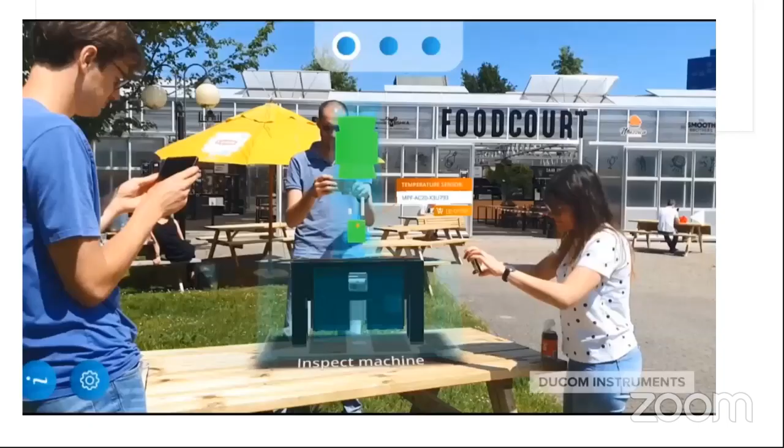A little bit of a quick update on what MOOHA is, because this connects us to the next step, another element that we cover in smart industry. So this is a quick introduction to what MOOHA is. Basically, she brings a virtual tribology lab experience. This is the digital twin of our 4-ball tester, for example.

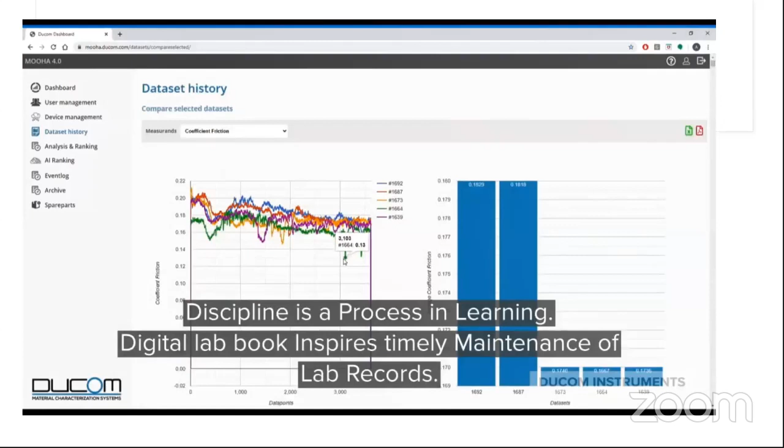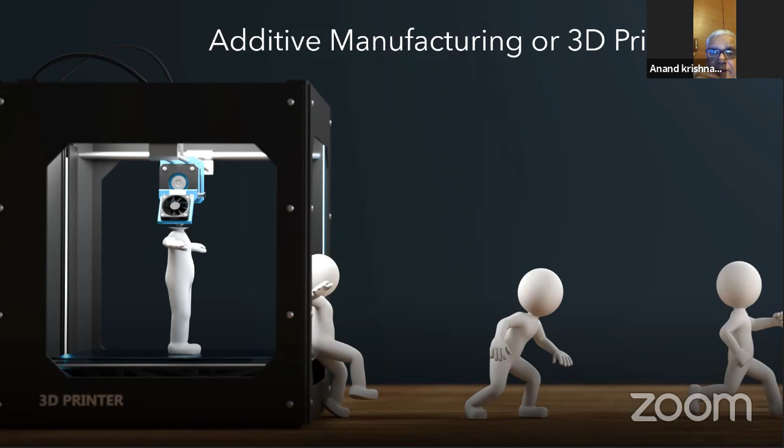Hello. Hello. You just dropped off for a minute. Okay. Can you see the screen now, Anand? Not really, I can only see my screen. I can see only my face, but not the screen that you're sharing.

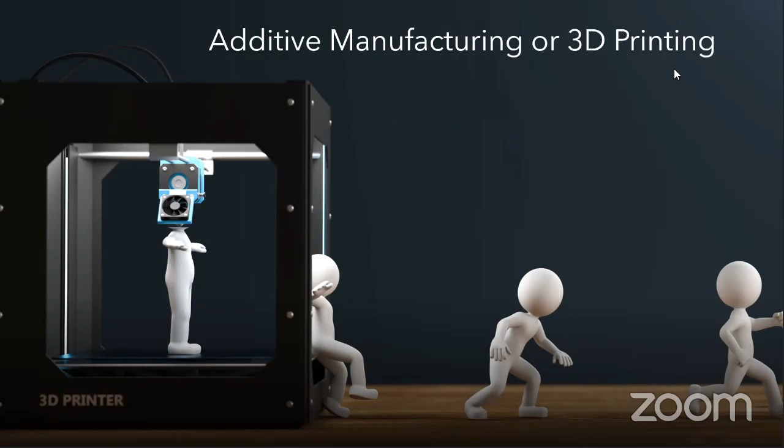All right, so I'll tell you what we'll do. I trust that the audience can see the screen, so I'll just ask you to scroll down the slides, and that should still work out. Excellent, I will do that.

So let me do some introduction to this, Anand. Right, sure. So the video you watch was related to how a combination of Internet of Things and augmented reality is able to create a digital twin of tribometers, and that was delivered as a product by MOOHA.

Moving forward, another important element in smart industry is additive manufacturing. What is additive manufacturing? It's a process of implementing manufacturing technology layer by layer. The benefits are that it helps reduce the cost of manufacturing, so the value to the customer is a high value at a low price. And the most important element for industry adopting additive manufacturing is that they are able to be competitive to any changes in market trends.

So that's the power — it creates mass customization, mass modularization, mass variety. As a result, you see the benefits here. 3D printing, additive manufacturing, which used to be largely limited to a prototyping tool, is moving towards the mainstream as a manufacturing tool. It has changed how we design, how we manufacture, and how we sell products.

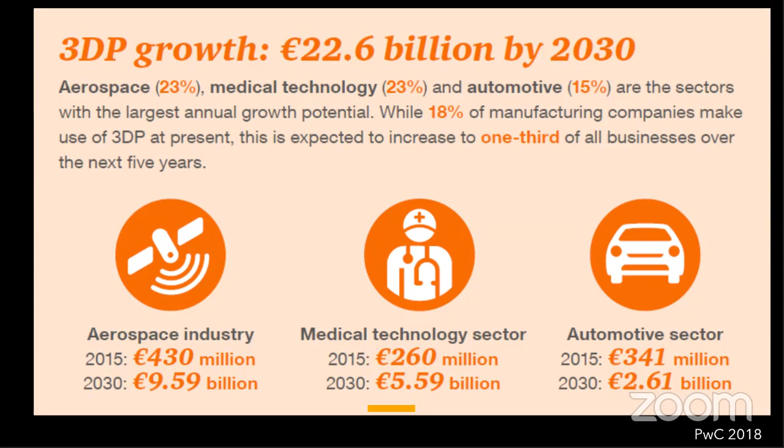To discuss in depth how additive manufacturing would be playing a very important role in various sectors, and how tribology would be creating more value here, and the concepts one has to be aware of before jumping into additive manufacturing...

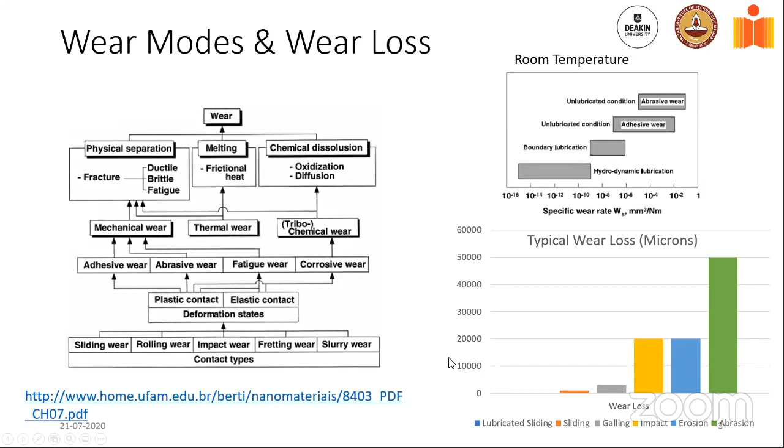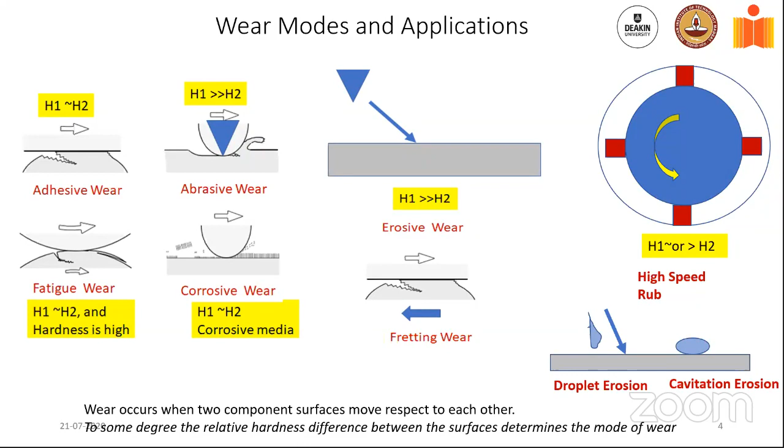Create better surfaces - that's really what I've done for a living over the last 30 years. Create component surfaces with better and better materials that actually have better resistance to wear. The question I'm posing now, and towards the end as well, is how do you essentially combine additive manufacturing with better wear resistance?

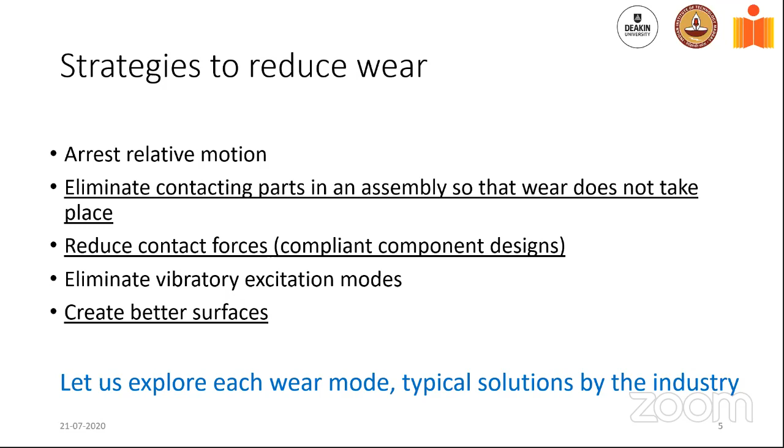Now I'm going to jump gears a little bit and show some cartoons of turbo machinery. This goes back to the ASM Handbook in 1992 by J.D. Schell, Aircraft Engines. He was my mentor, and I want to say he passed away many years ago, but he was essentially a master in this field, and he knew everything about wear in turbo machinery.

This is a very busy slide, but what I really want to say is that all these black dots represent what is called sliding and fretting wear. These open circles represent high-speed rubbing, which takes place at Mach 1 velocity. Then you have these bearings, which are high-speed, highly loaded bearings - sorry about the small font. And then you have fasteners, which can undergo fretting. In a very simple snapshot, this covers the entire spectrum of the kind of wear that would take place.

What you would also see is that the engine is rotating, it's on the wing, it's taking off from the runway. You can have sand and snow and salt during winter, and it could pick up all the sand into the engine, which would cause erosion. You could have flights going back and forth between Bombay and the Middle East, for example - Bombay is dry and dusty for 8 months a year, very wet for 4 months, but flying into the Middle East it picks up sand again, and you have solid particle erosion taking place, which is very severe.

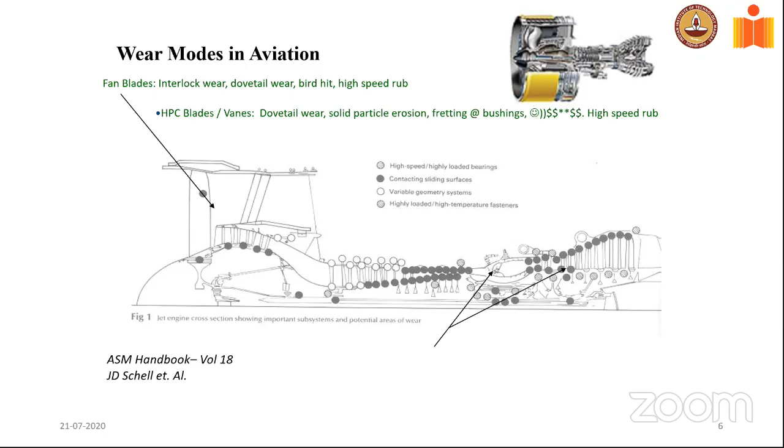So why does it matter? I'll ignore the line on pitting corrosion, that's a different mechanism. But when I look at fretting and impact, we can see a 3 to 5x reduction in life. Looking at solid particle erosion, there can be a 3x reduction in life, with a 1 to 2% drop in efficiency. Look at high-speed rub - you have a 1 to 2% drop in efficiency. And then you have high temperature thermal barrier, which I would leave for now.

What happens is that you have a wide range of operating conditions, as the table shows, all the way from 10 MPa stress to 1000 MPa stress, room temperature to 1000 degrees Celsius for fretting and impact.

What would be the solution for fretting and impact? We have a complete suite of coatings, and I would really recommend you look at ASM Handbook Volume 18, 1992, and also ASM Handbook Volume 18, 2017. I was asked to write a review article for wear and erosion issues on gas and steam turbines, so between aviation and gas and steam turbines, the entire aspect of tribology essentially gets discussed in these chapters.

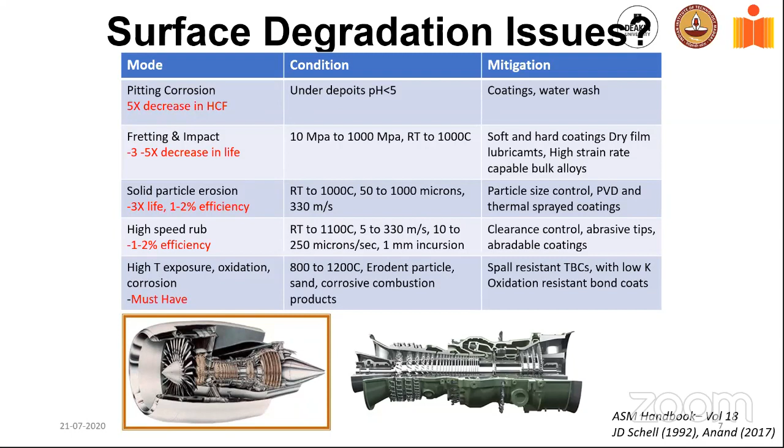For solid particle erosion, we use PVD coatings and thermal sprayed carbide coatings. For clearance control, we have soft abradable coatings. And as far as high temperature is concerned, we use thermal barrier coatings.

Now, not all of you will be working in the turbo machinery area. So if I start taking a look at dry sliding wear, lubricated wear, abrasive wear, solid particle erosion, and cavitation in all the other industries, it's extensive. I don't know how many of you remember the days of the 1980s in the US, or the 1970s and 80s in India - the cars we had essentially had very thick paint, and the exterior was not glossy, it had a very dull matte finish.

The reason why it had a matte finish is because when you cold roll the steel, the wear on the rolls essentially marks the steel, and you get the steel coming out of the cold rolling mill with a matte finish because of wear. It would have scratches, a matte finish, and so on.

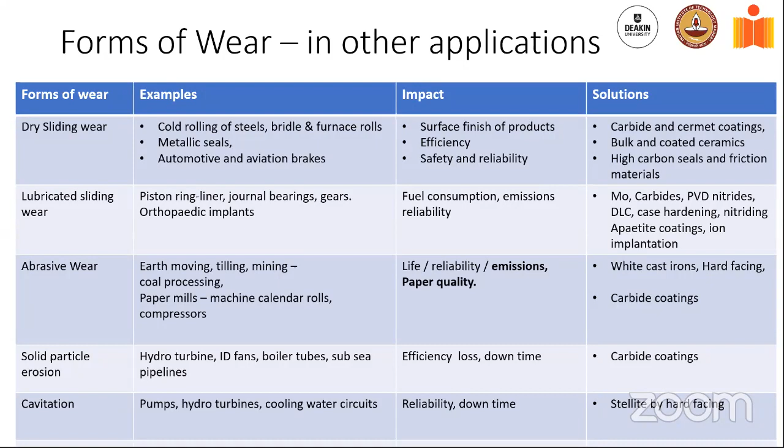So the question then is, how do you go the additive manufacturing route and still come up with a solution? That's what I'll come to in the subsequent slides.

One more example of wear, but a good example of wear. Without wear, you cannot have machine surfaces. All the machine shops would go dead if you didn't have wear taking place. It's a very complicated phenomenon. You have a cutting tool that gets in contact with the workpiece. It digs into the workpiece, causes intense plastic deformation and shear. As the intense plastic deformation takes place in a very localized region, the heat builds up and the surfaces oxidize and slide against the cutting tool, leading to what we call crater wear.

Underneath the cutting tool, in the wake, you have tensile stresses. You can have abrasion taking place. You can have chipping taking place. If you see this graph, you can actually see 3 different wear mechanisms taking place on the cutting tool when you do the machining.

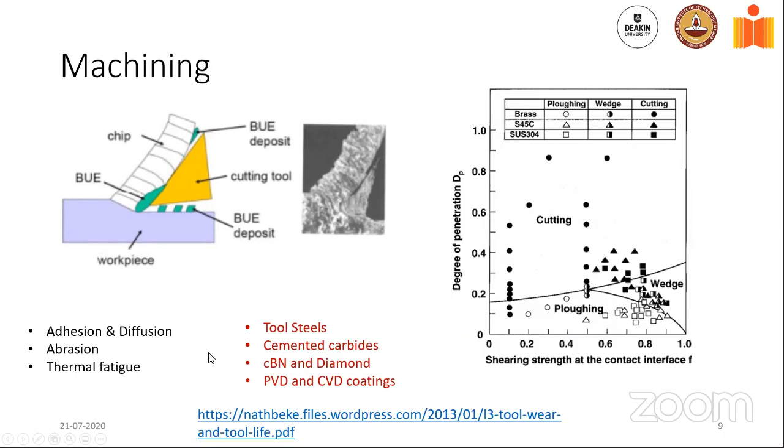So again, what you want to say is that wear is a surface phenomenon, and the bulk materials essentially perform the function of providing strength, durability, reliability, and so on. And when the surface and the bulk are actually married together to have a durable component, you do that through surface engineering. And that's really what I want to talk to you about.

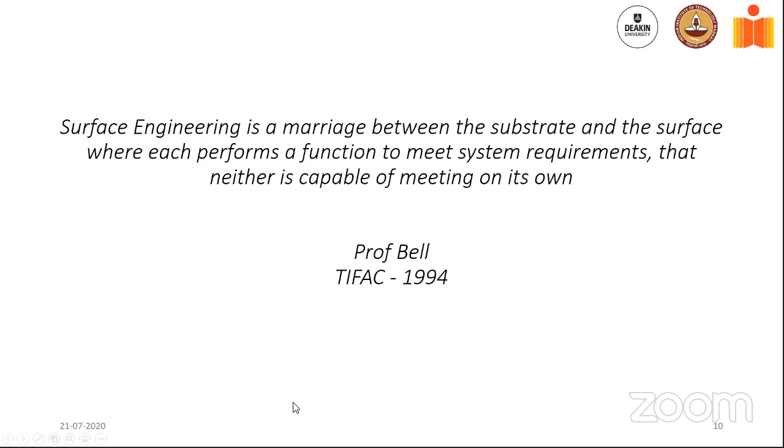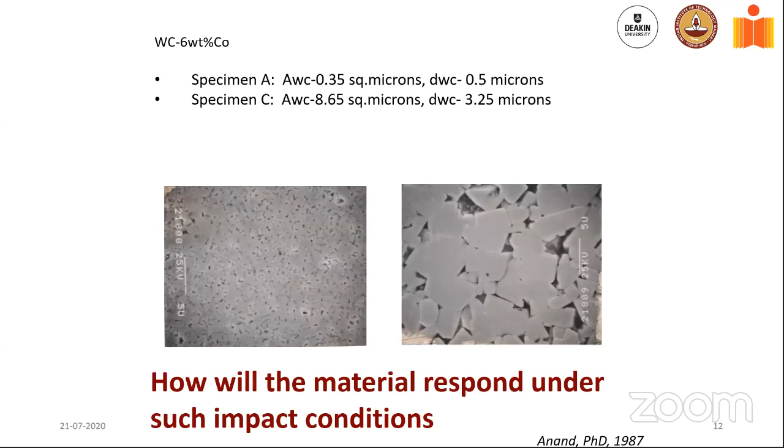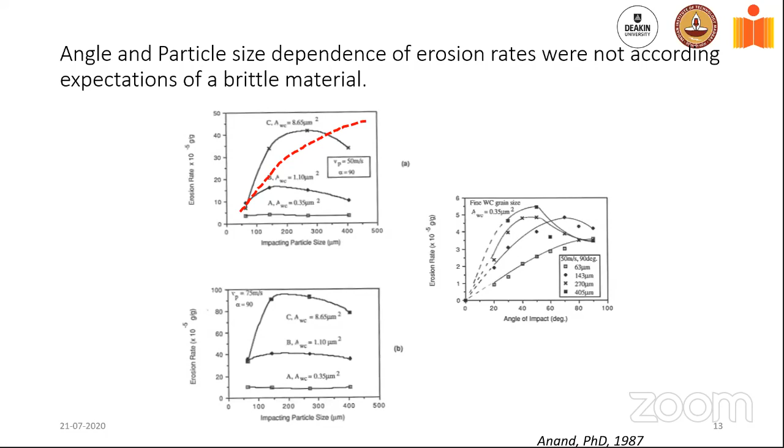Some of the best materials that you have today to resist wear, even now after 30 years, is tungsten carbide cobalt. We use it for cutting tools. It's used in mining industry. It's used in aviation parts to protect components from wear. It gets used in pumps. It gets used in compressors. It's really extensive to see where it gets used.

But the trick is two things. One is that I want to have a coating which is dense. So I don't want a porous coating which has got poor integrity, because the pores essentially are crack formers. The pores would then come together and they would form a crack, and the crack would propagate. Irrespective of how good your material was, because it is deposited in a manner of poor integrity, the whole thing would come apart.

So what you do essentially is coat these materials. You start off with powders which are around 10 to 35 microns, and you put them through a thermal spray gun. You've got plasma, which is a high temperature process with moderate velocity, 200 meters per second. And then I have high velocity oxyfuel, which is lower in temperature but higher in velocity.

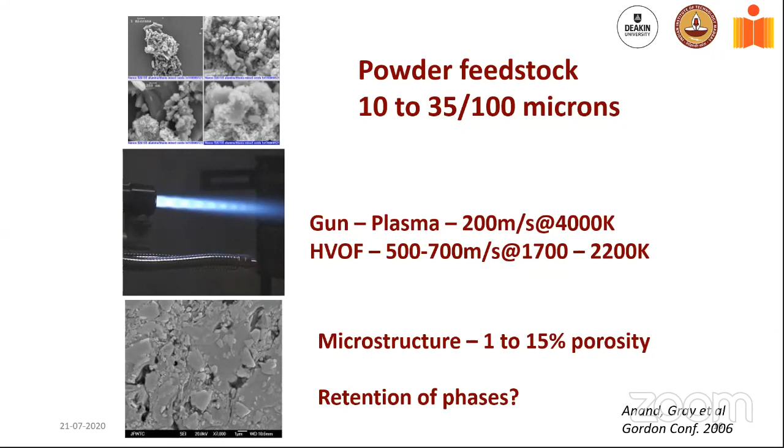So that's what you're going to see in the next slide, which is engineering tungsten carbide-based thermal spray coatings for fretting resistance. Fretting resistance, among other things, is a function of fracture toughness. I can't show you all the data I have on fretting wear properties - that gets into stuff which is proprietary. But what you can see is that for the same composition, by adjusting the process parameters and the equipment used, I can essentially have a fracture toughness change by an factor of 3. So I can go from a fracture toughness of around 2.5 MPa square root meter to around 8 MPa square root meter. That's really because of the kind of microstructures that these coating processes have produced.

The reason why I wanted to cover this is that it is just not the material that actually makes it work. It's the combination of the material and process that actually makes this entire wear process work. So when you're beginning to look at additive manufacturing, you can't just say, hey, I'll somehow switch the powders and go to something which is of higher resistance using a DMLD process. You really have to start looking at how do you tailor the properties of the surface to get you where you need to be.

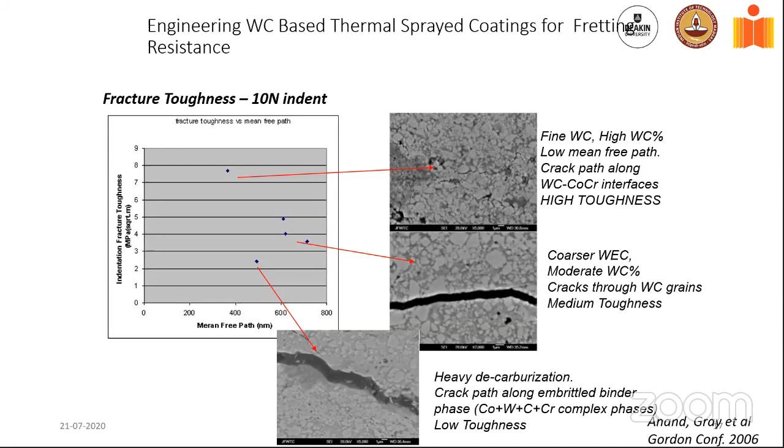So that's what I want to leave you with. And in this whole world of surface engineering, I'm kind of going to go back and connect this to the table that we had before that showed different wear modes for different industries with different coating processes. We can essentially do two things. One is take a component surface and go underneath and change the structure and composition, which is what we do through ion implantation, through carburizing, through nitriding, and induction hardening. Or I can take a component and essentially deposit stuff on the surface.

And that's what I would do, essentially going from hard facing, thermal spray, plating, CVD, PVD. Broadly, hard facing can get you an inch of material on the surface. Thermal spray can get you about 2 to 3 millimeters. But typically, when you're looking at a carbide coating, you're looking at 250 microns, around 10 mils. PVD ends up at around 30 to 40 microns max, 2 to 3 microns typical. CVD ends up at around 10 to 20 microns typical. Plating is 50 to 100 microns typical. So you do a lot of things at that length scale to essentially change the component surface.

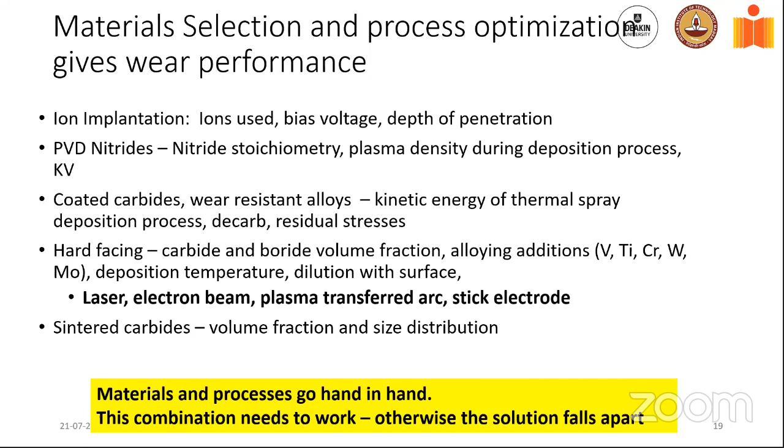If you move to the next slide, which says, can additive manufacturing reduce wear? The first thing you want to do is see whether you can arrest relative motion. Let me give you an example. When you have a component assembly, let's say a casing, a liner, a hook, all coming together, you really have sliding interfaces between the casing, the liner, and the hook. But if you were able to combine all of these into one single part, you wouldn't have anything which actually moves around. There are no nuts, no bolts to get loosened. This is one single component. Apart from doing many things, such as reducing design complexity, reducing weight, easing up the supply chain, you could potentially eliminate some of the wear issues that would typically take place in turbo machinery because of all these moving parts.

Second, as I said before, when the contact stress is high, the wear is high. When the contact stress is low, the wear is low. There may be exceptions here and there, but this is largely true. If I had a component loaded to, let's say, 1 KSI, and another set of components loaded at 10 KSI, with the same materials, you're going to find that at 10 KSI the wear is much higher. May not be 10 times higher, but definitely much higher. So if you had something under your belt to reduce the component load by making stuff more compliant, you would be able to reduce wear.

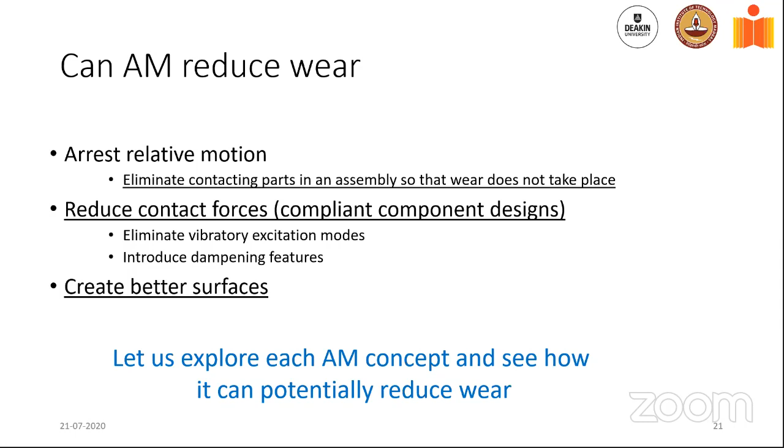Here is an example of a brake pad assembly. You have the pad, and you have calipers, actuators, and they all come together. Ultimately, when you press the brake pedal, something in the system pushes the brake pad against the brake drum and causes the vehicle to slow down or stop. Certainly, you need at least a couple of moving surfaces, you cannot eliminate motion altogether. But could you take a look at this kind of assembly and say, how do you bring in the functionality of a braking actuation system, reduce the number of components involved, and use additive manufacturing along the way to make this whole design simpler? Because while you do so, what you've done essentially is reduce the number of moving parts and therefore reduce the kind of wear that will take place.

What you also have to remember is the brake pad essentially does not just go on its own and contact the brake drum. It's guided. So when you have wear taking place and the wear is not uniform, you don't have the brake pad going smack on normal to the surface perfectly. There can be a little bit of misorientation here and there.

And therefore, when you have a little bit of misorientation here and there, the brake pad doesn't jam smoothly and uniformly against the surface. It's kind of cocked at some angle, which will lead to higher stresses and therefore much higher wear. So there's a lot that can be gained through designs brought to bear through additive manufacturing, where you could actually control the forces. And when you control the forces, you actually reduce wear.

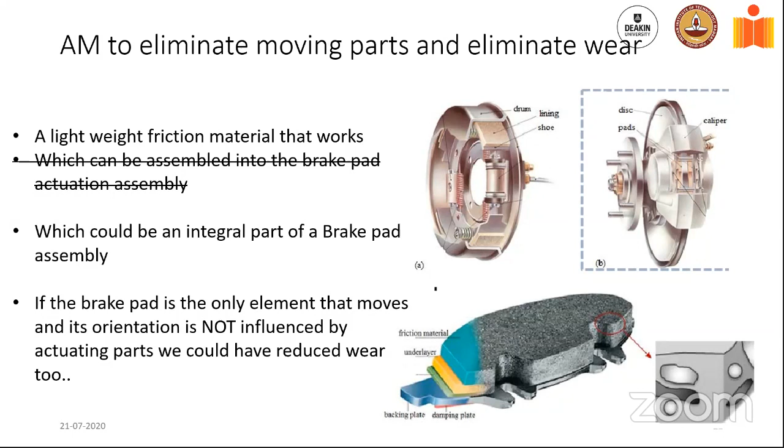If you go to the additive manufacturing literature, it's replete with examples of designs where you could still have the same functionality, but because the component is not one rigid body, but essentially a web of interlinking meshes where the mode of loading is controlled, the bending loads are controlled, the flexure loads are controlled. This kind of system is both lightweight, has got great properties in terms of being compliant, has got great properties in terms of dampening out vibrations.

So if you had a component which is still rectangular in shape, but underneath, inside, there's a scaffold which is compliant, you could actually make this component contact with not the same kind of contact forces, and there could be substantial dampening because of how the component got designed in the first place. So these are some examples of essentially how you could reduce contact stresses. You could reduce sliding distance because it doesn't vibrate anymore, or vibrate to the same extent anymore. And all of that actually works out really, really well.

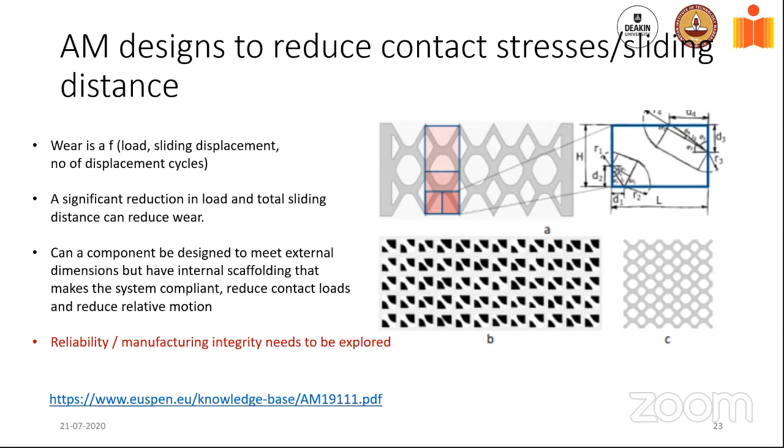So stuff to think about. I'm not saying that we can jump and go and get this done, but you really have to take a look at these kind of concepts and still see whether that design feature has got the manufacturing integrity. Does it have the overall reliability in terms of the overall balance of properties for such a design to work? But there are more and more examples of concepts like these getting used in additive to actually solve problems.

Finally, come to creating better surfaces. Each wear mode and each industry segment has a material solution for which the combination of the material and the process used is essentially a gold standard. So I'm just reading out examples.

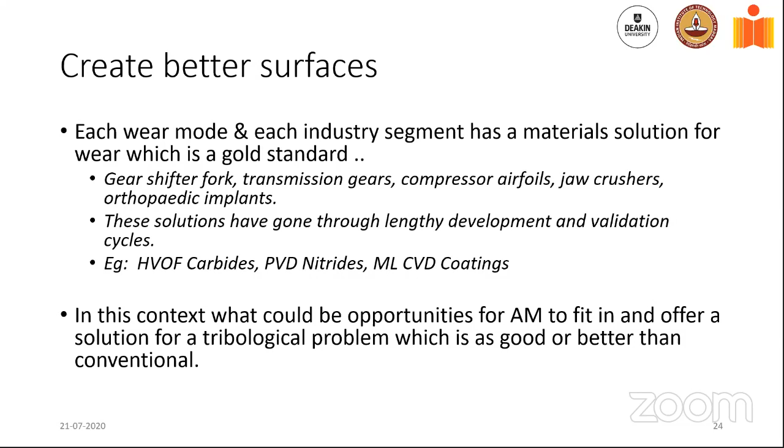In this context, the question to ask is, can I still get additive manufacturing to have these kind of surfaces with this form of functionality? And I don't want to be a rosy-cheeked optimist, but I really want to understand what the challenges are and see how do we use the strength of additive and the strength of materials and the strength of processes to come together to make this happen.

So let's go to the next slide, which gets into, keeping all of this in view, that we already had gold standards. So you want to kind of kick off the gold standards and still be additive and still be better. So where would you use them? And I think this is really where the discussion would be very rich and very useful.

I would think of valve seats. That's my personal opinion. Primarily because they're small, primarily because it's a great opportunity to grade the composition, make it more resistant towards the surface, and essentially more tough underneath. Bearing cages, extremely complicated in shapes. Right now, we don't use the best materials that are available because the processing in itself is a challenge. So what can you do with bearing cages? It can actually work really well.

Take a look at bevel gears. They're very complicated in shape. The buy-to-fly ratio is very poor. What can you do with additive manufacturing of moderately sized bevel gears? They could actually work well. Machine tools, non-contact seals, implants. So what's the criteria for us to say, I want to do it by additive, and I think I have a better way solution?

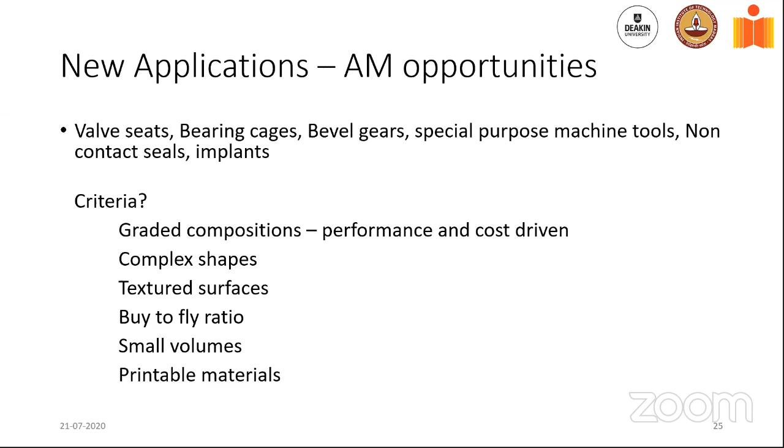When you saw local damage, you literally had to either machine off the damage and rebuild, and once you got to a thickness less than what's allowed, you would have to throw away the die - throw away something around $15,000 to $20,000 in cost. That would break the backs of small scale industries because they would spend so much money just on tools to make things work.

So if you could get additive to work in a scenario like this - where you do some scanning, understand what the desired size and shape was of this particular part, understand what the current size and shape of the part is, and essentially have a CAD drawing that tells you what needs to be printed on the part, where, and to what thickness - you could actually repair and restore the part, and this could be a really vital cog in the circular economy. This is a great opportunity to go and look at additive and see how you get it to work.

A very contrarian view to essentially some of the cool stuff that we would think about, but this is really brick and mortar. This is really where money gets wasted - we essentially have a carbon dioxide footprint because we throw away stuff back into the furnace when you could actually be reusing them.

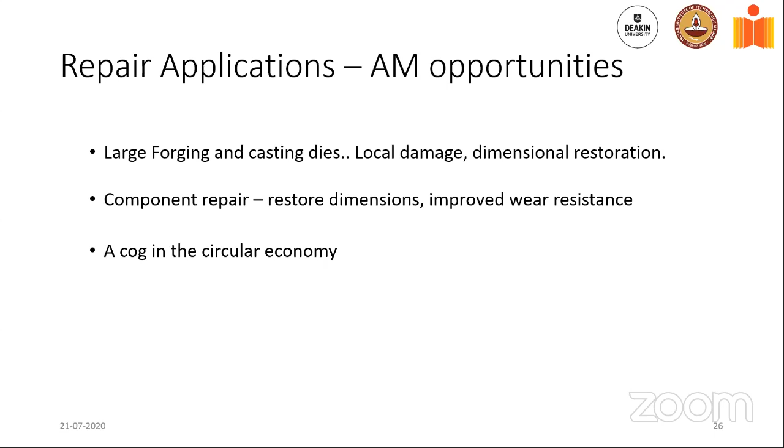When you think of additive, we think of lasers - scanning back and forth, building parts very complex in shape and so forth. That's a very important piece of the puzzle, but that's really good for small, complex parts with demanding properties, where dimensional precision is of greatest importance.

But when I have larger parts which need local buildup, I could look at DMLD as a process. And when you have larger parts where the property requirements are not so exacting, I could be looking at binder jets, which get me a printed part with a density of around 95% - a 5% porosity. Those features lend themselves beautifully to, let's say, lubricant impregnation.

So when you're looking at journal bearings, could you actually binder-jet that kind of component composition, impregnate lubricant, and bond it against a backing plate and roll it to get it to be a journal bearing.

And then when you start looking at the world of dies for forging and so on, where the dies are huge - could be half a room for an automotive component.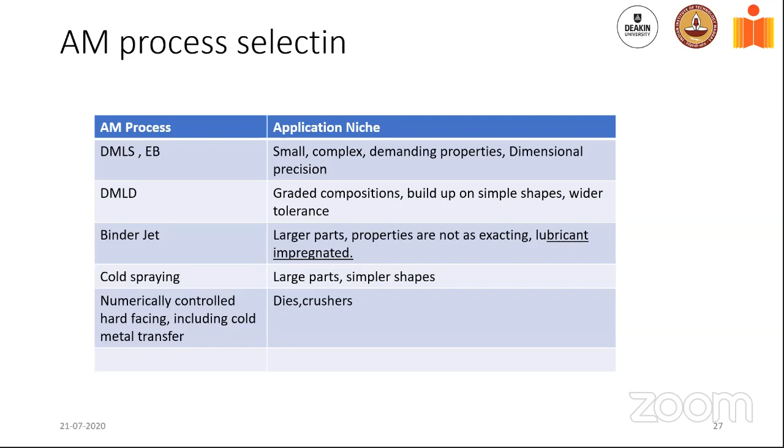So, what are the challenges from a wear perspective? Going back to additive and the whole aspect of solving wear, we have current workhorses, and I talked about that. So we need to benchmark additive manufacturing capable materials against what's been successful in resisting wear in different modes.

I would really start with stuff like stellite. I would start with, let's say, tool steels. I would start with white cast irons. I will not go to high volume fraction tungsten carbide cobalt to be additively manufactured -- I think that would be much harder. But when you start beginning to look at metallic materials, which are workhorses for wear resistance under many conditions, those kind of materials is really what I would look at for additive manufacturing to solve specific issues.

While thermal spray coatings and PVD are additive processes -- you don't subtract, you only add -- we're not being completely honest with ourselves when you look at the spirit of additive. The spirit of additive is that you want to produce a component of net shape, very complex in shape, very complex in functionality, which blends in bulk properties and surface properties seamlessly.

And so you want to start looking at stuff like stellite as the kind of materials that you would use for additive manufacturing to solve many problems. Maybe, as I said, cast irons, maybe do binder jetting and lubricant impregnation. Many things are possible.

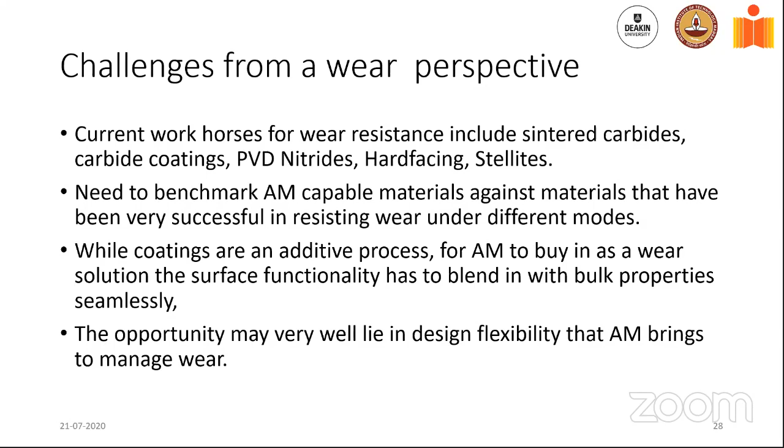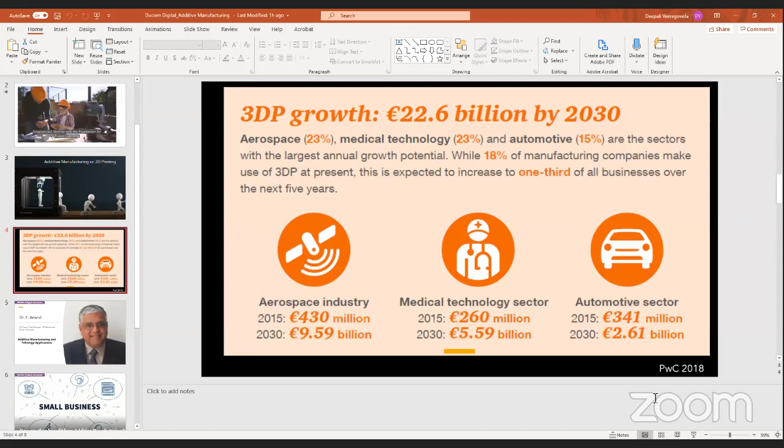I would give you two answers. The first is binder jet, because this process inherently has a certain level of porosity since the binder is burnt out. Even after sintering, you end up with a net porosity around 5%. These pores are fairly big - not a millimeter, but let's say 5-10 microns - and that's enough to entrain lubricants, greases, or even solid lubricating particles. So binder jet is one place I would go to.

The other area that hasn't been explored well, unfortunately, is thermal spray - and I'd hate to call it strictly additive manufacturing because you don't have that kind of control over component sizes and shapes. It's a device that gets you thickness of maybe 50 microns to 2500 microns with precision of about 50 microns, which isn't really enough to call it additive. But we don't see enough work combining hard particles with lubricating additives. There are a few examples, but not enough, and that's an area we need to work on more.